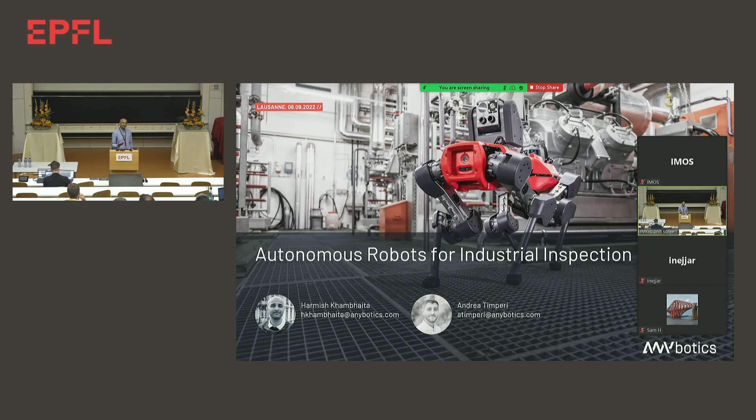So I will be talking about what we do at ANYbotics. You will also see the robot. And I'm joined by my colleague Andrea. He's already starting the robot, as you can see. I will show a bit about how we approach industrial inspection, and also behind the scenes how the robot works. So let me start with why.

Why are we in this business of industrial inspection? Why do we think that robots are necessary for industrial inspection? There are three things, basically. There is a huge shortage of workforce. People are leaving, they are retiring soon, and not enough people are joining. Second, billions of dollars and billions of euros are lost every year due to unplanned downtimes.

I think Professor Fink's group also works on how to do this preventive maintenance so we can solve these unplanned downtimes. And the third is that the leading cause of industrial accidents is human error. If we can deploy robots, that might solve this issue as well.

So even though there are these challenges, things are changing. And we have seen those changes in the past. For example, in the manufacturing industry, I think now all cars are manufactured with these kinds of manipulator robots. So it was already disrupted some years ago. And right now we are also seeing that warehousing is being disrupted by mobile wheeled robots.

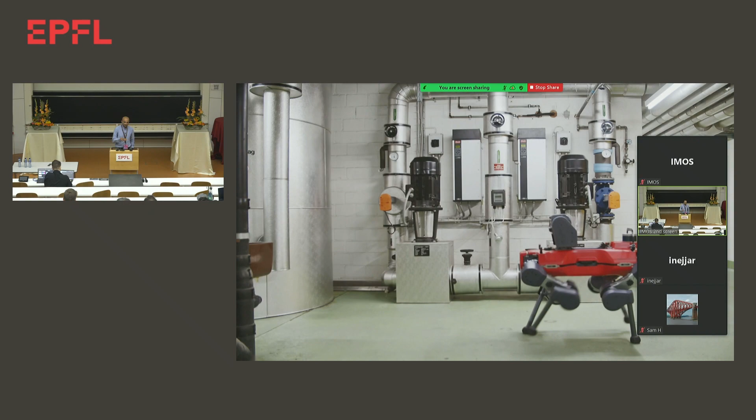So this is ANYmal. It has all the sensors built in. Of course, it's a four-legged robot. It can map the environment in which it needs to work and then autonomously plan its path from A to B. With that, you can build missions so you can tell it to go to certain places and do certain kinds of inspection. Here we are showing that it can detect temperature, it can detect sound, it can also take images and analyze them on board.

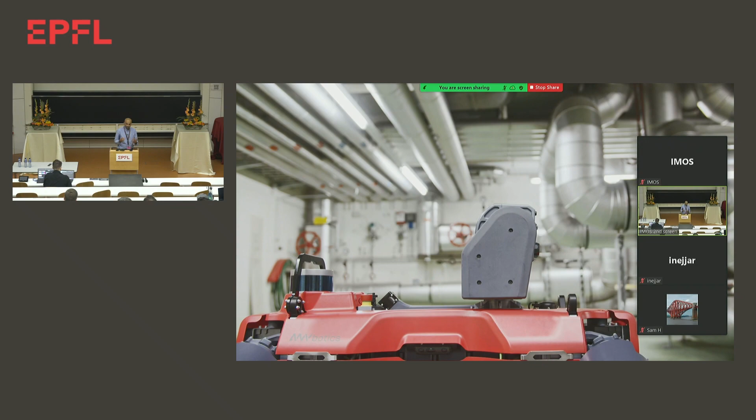And of course, the robot can go anywhere a human would go, so you don't have to change the environment at all. That is also one of the reasons why we think legged robots are more suitable.

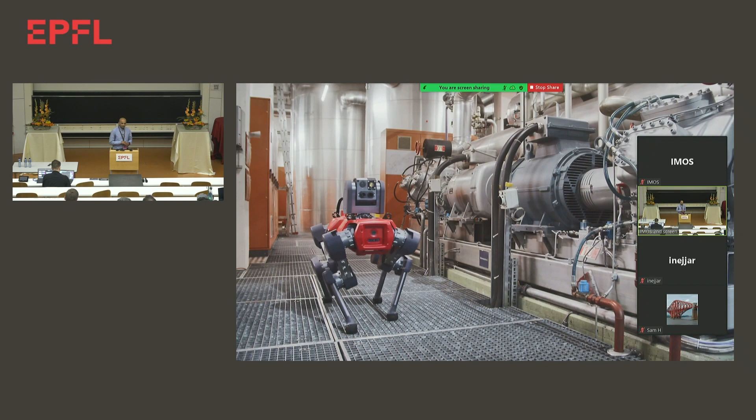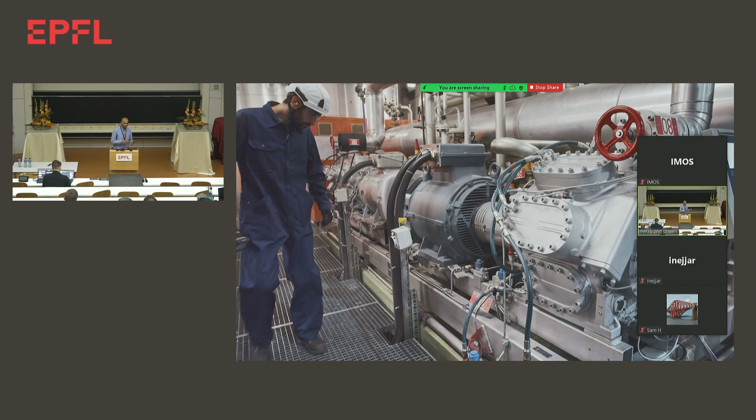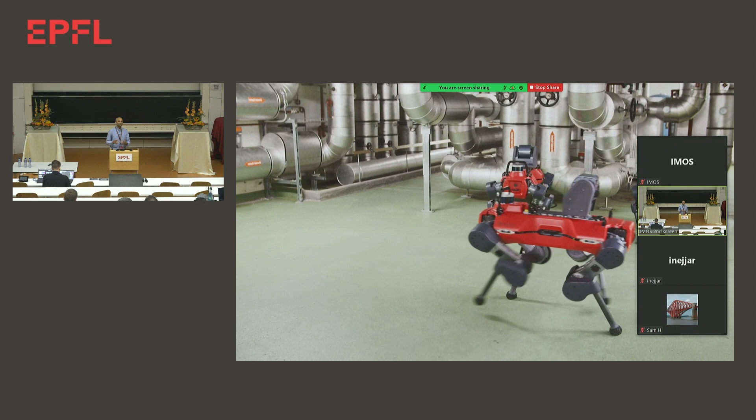Here, for example, we are showing that once the robot detects something, it can also tell the operator that something is wrong, and then the operator can quickly go into that place and fix things when necessary. And the autonomy of the robot is also extended by autonomous charging, so it can actually detect the charging station, sit down on it, charge for 2 hours, and then it's ready again for another 2 hours of inspection.

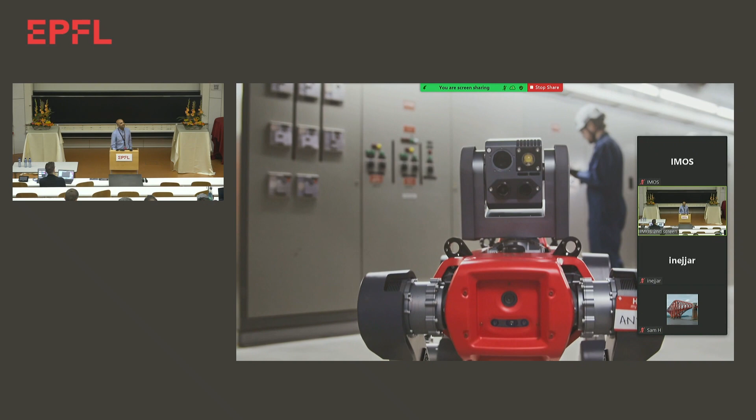While it is working here, I want to show also, this is not just a kind of a toy. It's, of course, useful to do substantial cost saving in the industry. And I want to give you maybe 2 examples. So I was saying 3D scanning, so an onboard sensor, this is called a LiDAR device, with which it can actually collect 3D data of its environment, and then you can place different instruments in this 3D environment, and the robot, of course, can go anywhere in this environment.

And another application I would like to show is sometimes in the offshore, where you need to transport the people with helicopters, that could be quite costly. And having a robot over there could already save you up to 50K per trip. And these are the numbers which we found by talking to our customers, and we are trying to help them to actually save those costs.

Now, I would like to switch gears a bit, probably towards a bit of a scientific part, but still very much on the surface. So you have seen how the robot walks. It has actually learned to walk. So there is a neural network behind the scenes. And it is a machine learning technique called reinforcement learning, which we use.

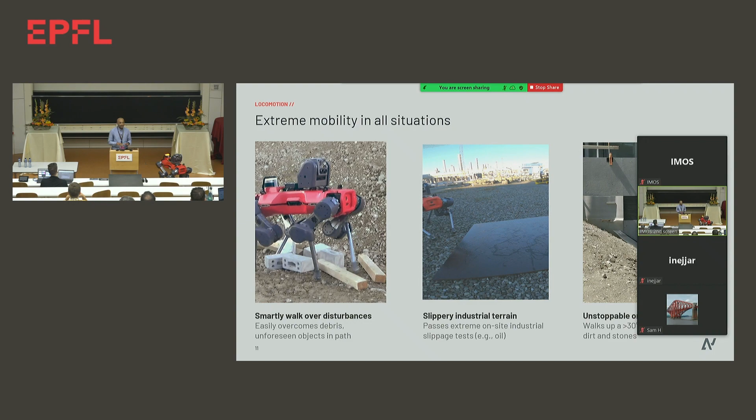And in the end, what you get is extreme mobility in all situations. So this robot is able to walk over any kind of disturbances, as we can see here. It can also walk on slippery surfaces, and this is very hard to program by hand. It's almost impossible. We tried it before. However, with learning-based techniques, it's quite robust. And it can also, of course, climb hills. We say up to 30, but we even tried 45 degree slopes, and it still works quite well.

However, as humans can also fall from time to time, robots can fall. And it turns out that you can also learn to stand up from any kind of situation. So here we took the robot on Titlis. We induced the fall. And then it can stand up by itself, also using these learning-based techniques, and can start walking again.

So really, if the robot falls, you don't have to go to the place and help it. It can help itself in that sense. And of course, we try many different situations in the lab to make sure that it stands up from any kind of fall we have encountered.

Next, I would like to also show a bit of what I was saying. Digital twin is a kind of a buzzword these days in the industry. With its onboard sensors, the robot can actually build very large maps, up to square kilometers, and also multi-floor environments. And then it can use these maps to localize itself within centimeter accuracy. This is actually very important in certain applications, for example, when you need to precisely monitor a temperature at certain places in the industry. So you really need precision.

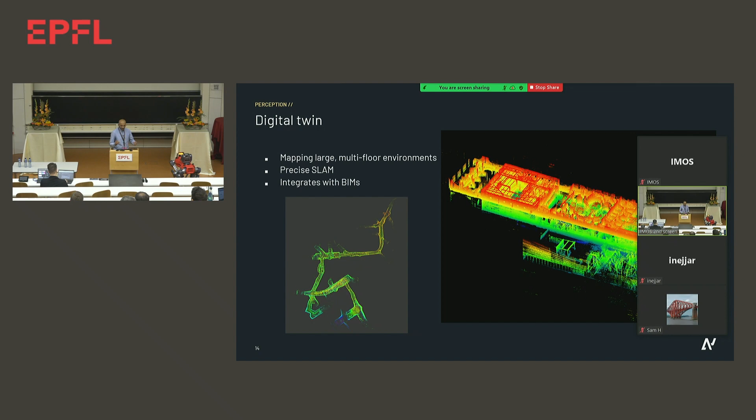And on the left side, we are also showing certain areas which you have not mapped before. This is a cave where you can remote control the robot, and in the end, what you get is an accurate map of the cave. And you can then, of course, transport this data into more industrial digital twins, because there is not one, there are quite a few. So we also provide exports to those data sets.

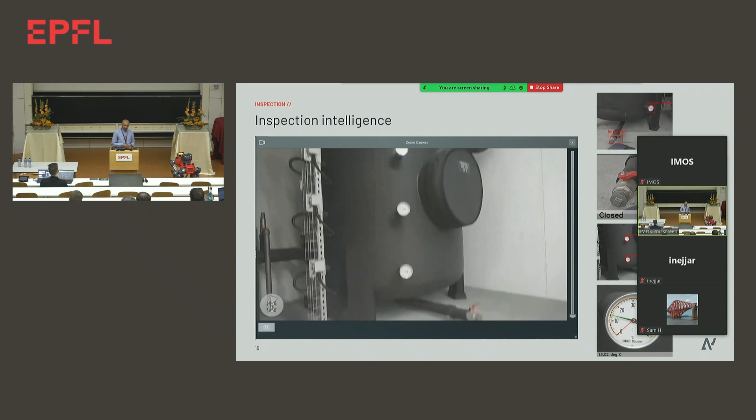And then coming to the part of inspection intelligence, on the right, what you see is the data capture part I showed you in the start of the value chain. The robot moves, it automatically moves its cameras, as at the moment Andrea is remotely controlling. And then from these pictures which it takes, it runs onboard analysis to figure out, okay, this image is showing, for example, a gauge, or it is showing a valve, and also it can say if the valve is open or closed, and what temperature the gauge is showing.

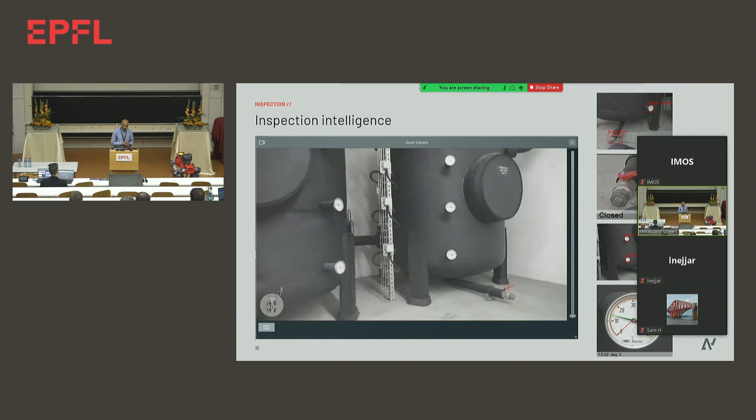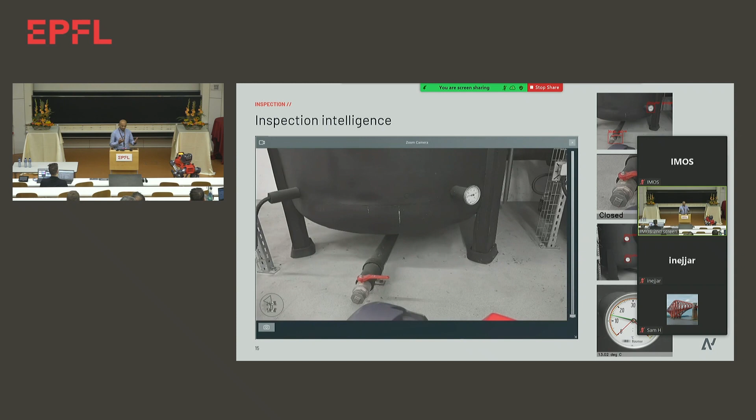So you have the full chain. It all runs on board, so you don't even have to put it somewhere in the cloud and care about security issues, if you like. And with that, we have complete onboard sensors which already can do a lot of things, but we didn't, of course, stop there, because many different industries would like to use many different sensors.

And then, of course, the last part is to export this data. On board, it can generate Excel or PDF sheets of the whole mission, so it will have all the data with it, all the analysis within it. But you can also go the other route, which is to sync this data anywhere into your system, and we found that there isn't one system there. So what we provide is also APIs to take the data out and put it onto your server, and then run further analysis algorithms if you want.

So with that, we have already found quite an interest from the different industries. And I think in the next session, the companies which are presenting might also have interest in this robot.

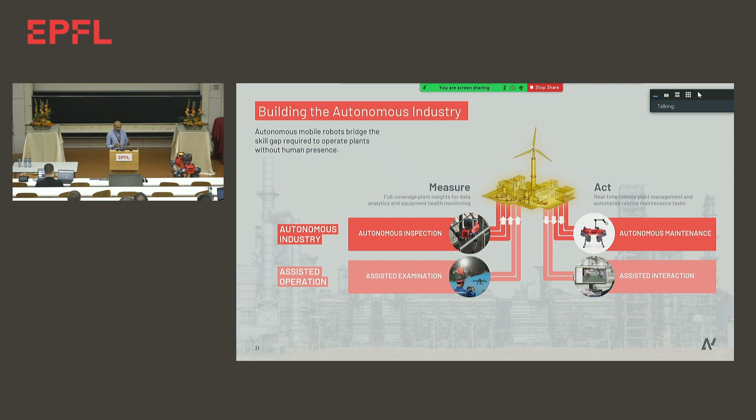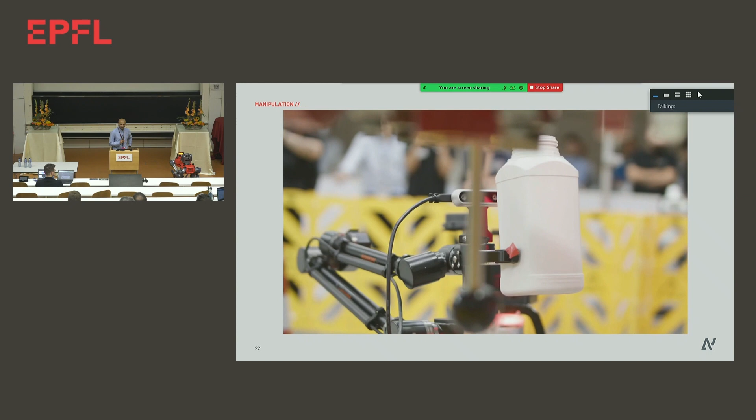Now, what if you want to also act in the environment? What if you can put an arm on the robot such that the valves I showed you, it can automatically open or close, so an operator does not have to go there? Or you can also do assisted interaction by remotely controlling the arm. So in fact, we also did that. We showed this recently at a chemical expo in Frankfurt, where the arm takes a bottle, opens it, puts it in place so that it can collect a sample, and then it brings this sample back to a place where you like.